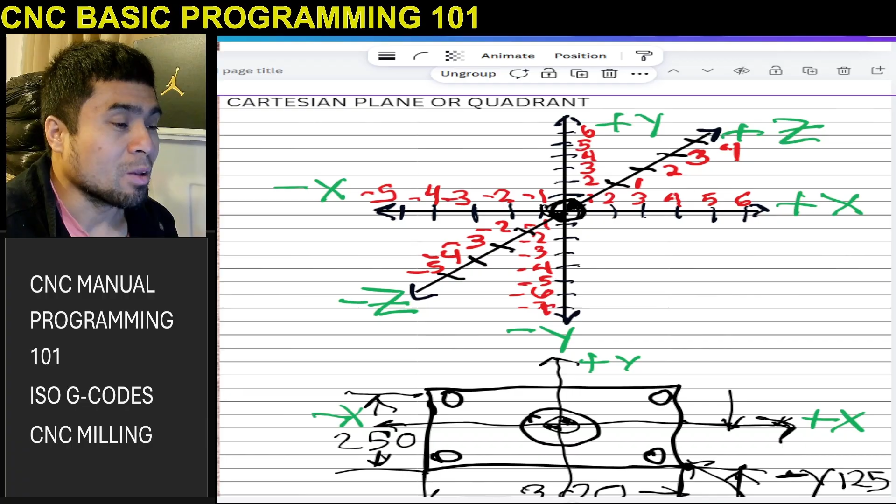So the topic today is, because in the previous video you already understood how the Cartesian plane or the quadrant is applied to the programming of parts. So I hope you already understand the use of the Cartesian plane in the actual programming of our parts. Once you understand the Cartesian plane, you will not guess anymore what value you should put in your program, because you already know if it is a positive or negative value.

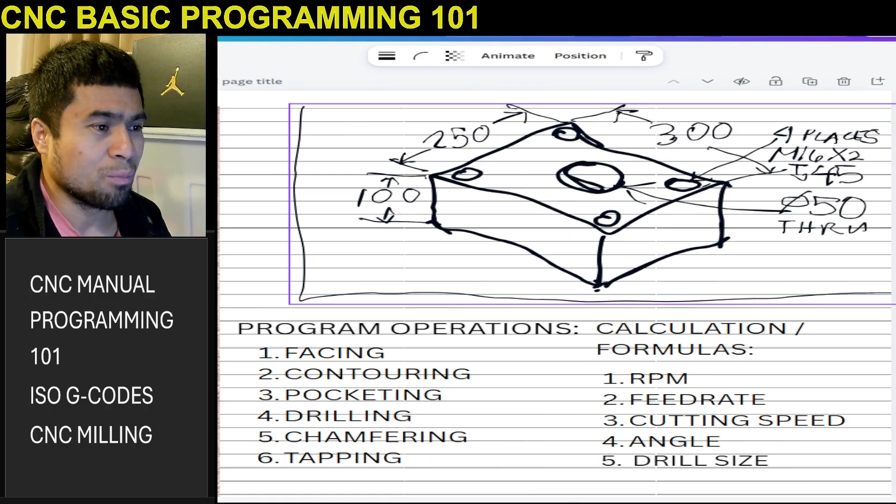So let's begin. Our topic today is the facing operation. Because this is isometric, I want to extract this one in an orthographic view. So let's get the top view, side view. But because we're programming the facing at the moment, I think I can copy this one. Let's just copy that one somewhere here on page 3. Paste.

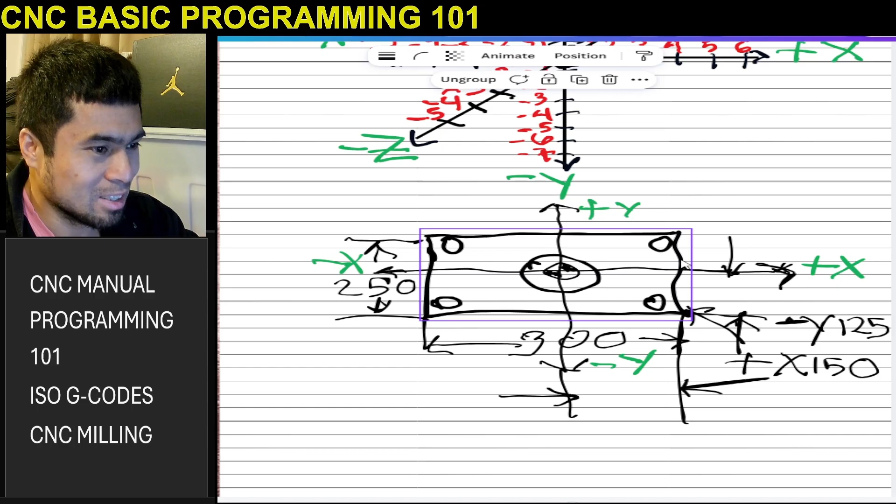Oh yeah, but only those. I will highlight again. I can probably copy all. One, two, oops. No. We can just copy one by one. But anyway, we will probably just draw. It's just easy to draw.

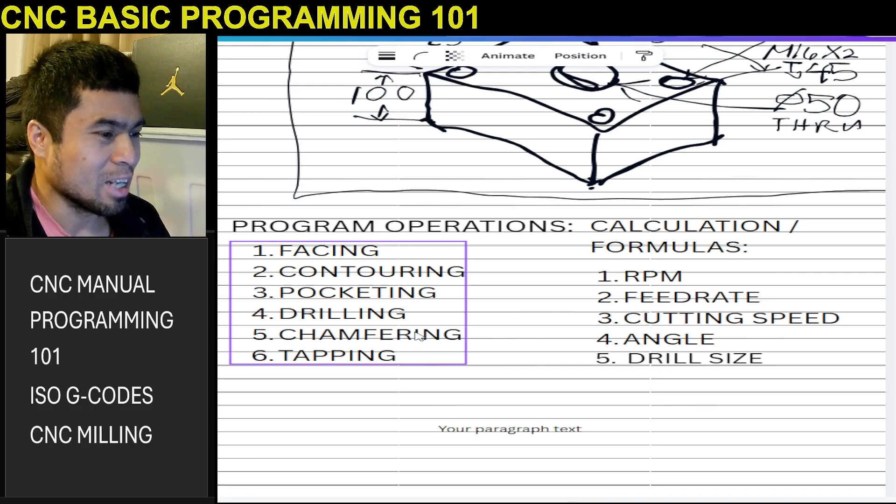So, for our topic for today, let's begin the programming so we can go directly. We will do all these operations: facing, contouring, pocketing, drilling, chamfering, and tapping. So number 1, I just want to put somewhere here the title of our first operation.

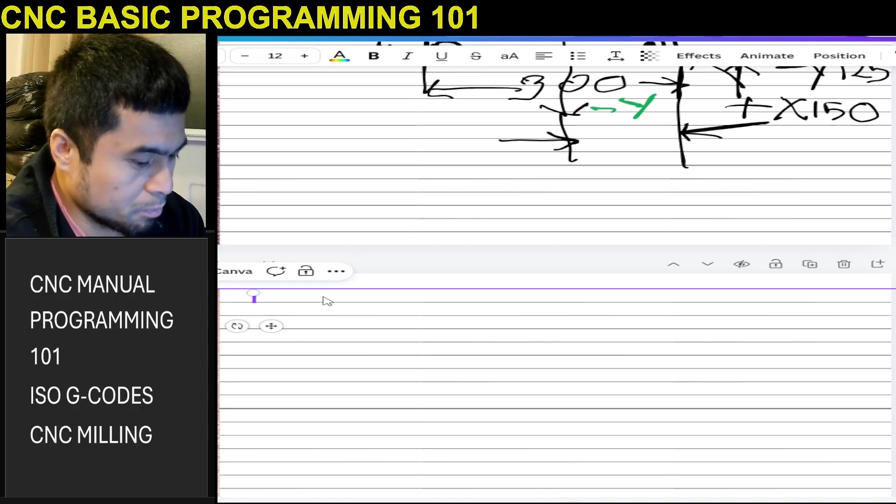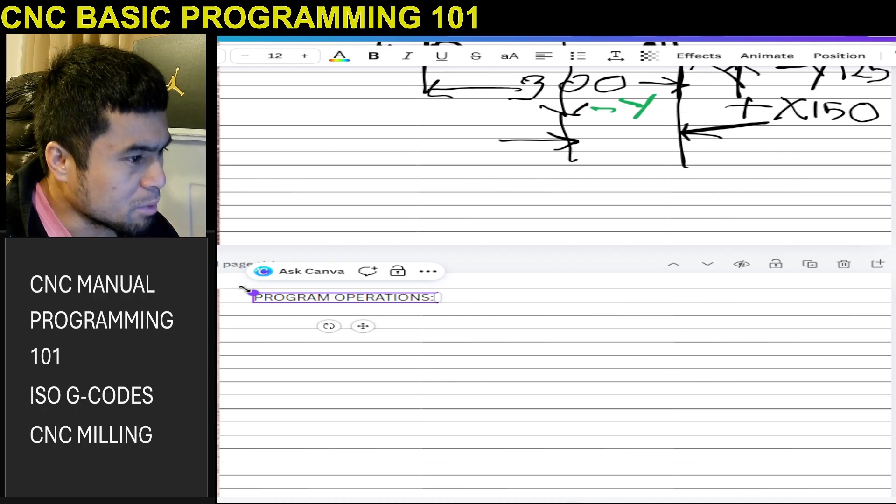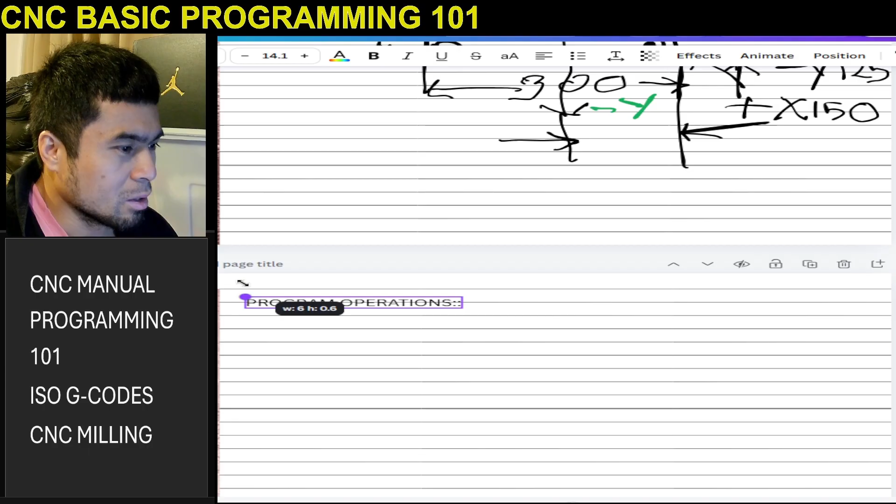Program operation. So program operation. Then I will highlight that. I will make it a little bit bigger so you can see the font. It's quite small, so, yeah. Can you see that? Why can't it get bigger? Ugh. I think that's all right. Just enough for program operations. Why is it doubled?

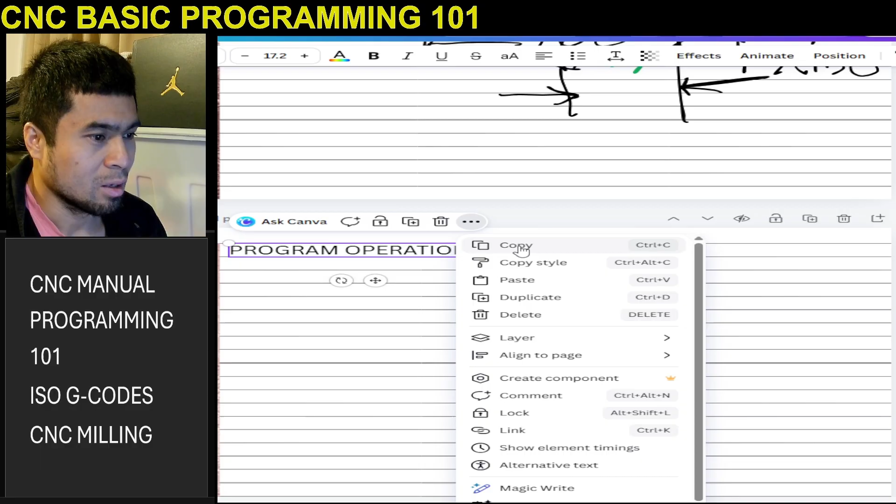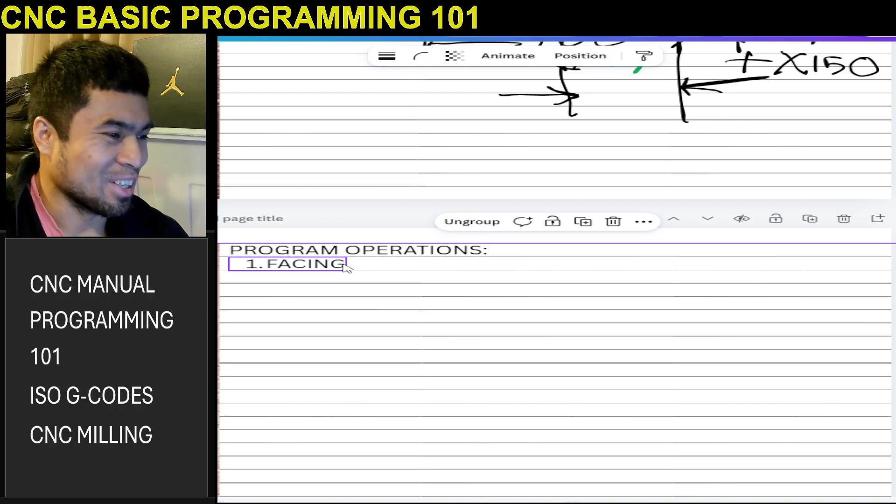Okay. So number one, tapping. I'll just copy that one and replace. Paste. Oops. Tapping. Why do I keep on saying tapping? Facing. Number one, facing operation. Yep. Oops, there's a number two there.

Just wait a moment. I'll just get my old notes so that we don't miss a single detail, right? Just wait a moment, please. Anyway, I cannot find my notes. I have some notes, but my old notes I think I put somewhere. Because you know what, I want to show you this one example. So all these old notes,

can you see it? I have a lot of books here. See this one? This book is from when I was trying to learn AutoCAD back in UAE when I was working. This year is 2010, if you can see there. Jumil Ignacio 2010. Can you see the date? AutoCAD. So I used this book for AutoCAD notes, and because it was not totally full, I also wrote in half of it when I was studying Mastercam.

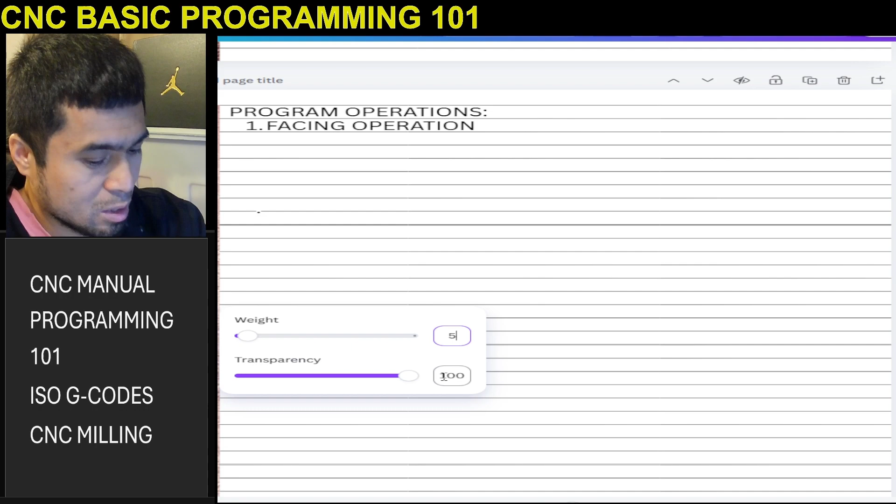So first, oops, it's not the one. It should be black. Let's make it 5. Then square. Again, please bear with my drawing, we're just using the sketch pad and it's really hard to use. So just assume that this is our block. You have to get the top view. So we will do the facing.

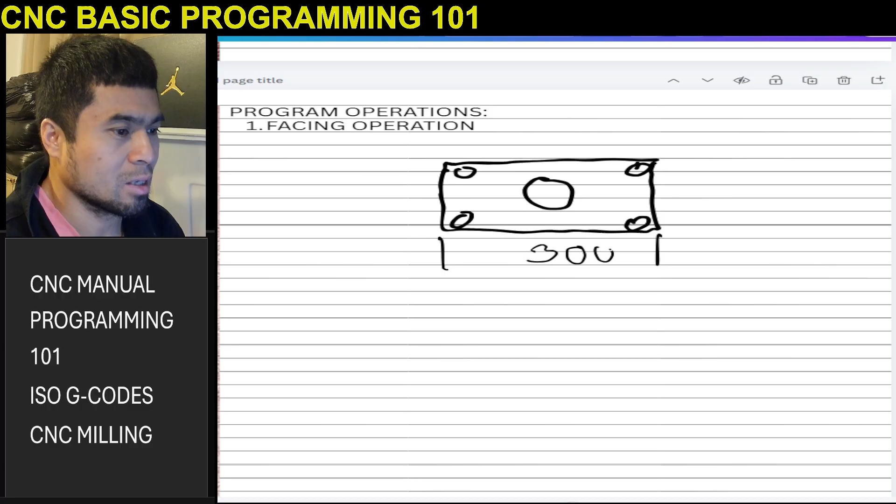So the dimension for this one is 300, and this one is 250. Yeah. Because we already have the drawing, for the origin you can pick whichever you want. You can pick somewhere here. You can pick your origin on this corner.

You can pick the top left, the top right, the bottom right, the bottom left, or the middle. You can pick whichever you want, as long as you understand how the Cartesian plane works for your origin. But when you do the programming, don't make it so hard. Make it easy, because you're the one who will read it and run your machine.

So make it as easy as you can, because at the end of the day you will read your program, and if it is hard to read, it's time consuming. So for me, for this kind of part, obviously we will take the middle as our origin or datum or WCS, right? The center is our origin, okay? If you want, you can still draw the Cartesian plane, but it's not necessary. I'll just draw it so you know what our origin is, okay?

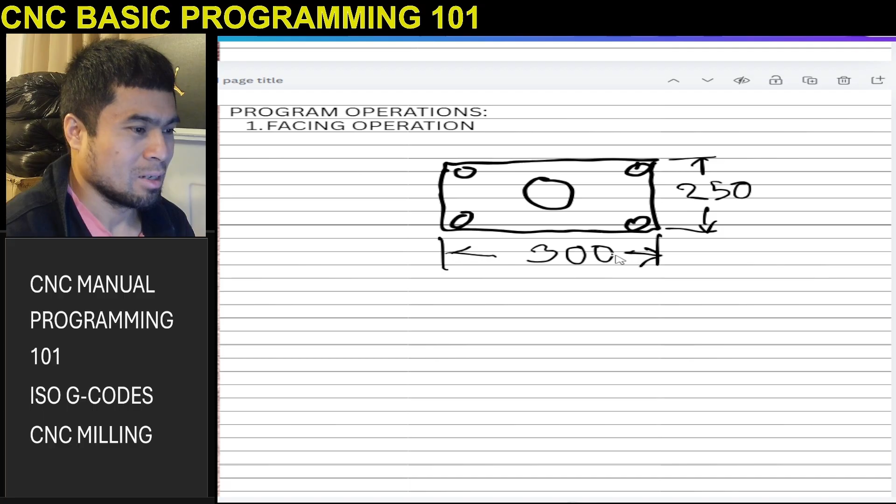Oops. I'll just draw it so that at least you know that is our origin from our illustration. Oops, it's not in the middle. Oops. It's not in the middle. Oh, wait, what? Why? Where is the other one that I already drew previously? It's really hard. Yeah.

So our origin is in the middle here. Let's draw the symbol of the origin. So that's the origin. Our origin is in the middle. So that's our origin. So we have 300 by 250.

So before doing the programming, the first step, before you do the program, you have to study your drawing first. You have to check your drawings, whether the dimensions are complete, is there any missing detail. So after you check your drawings, of course, while checking the drawing, you can figure out already where your origin is.

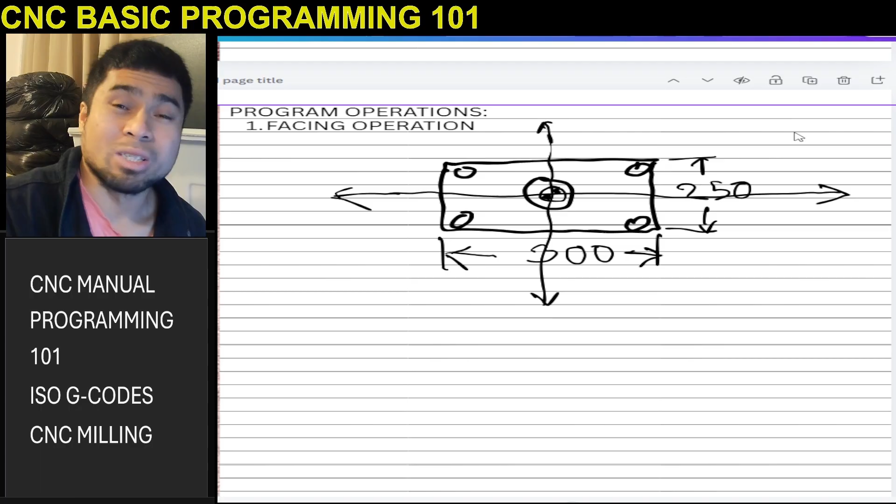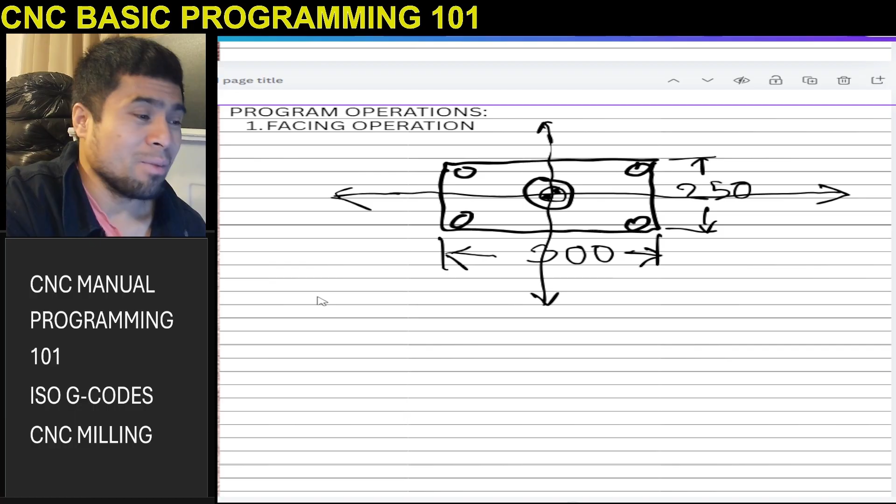So since our first operation is a facing operation, basically you need a face mill cutter. So you have to know what tools are available in your machine. Because we're just doing a sample program, let's say our face mill cutter is diameter 100. So I'll put notes here, some details, so that at least you will know that.

So face mill. Oh, what is that? What is that? That just came out there. So face mill. What are your tools?

Let's put the origin first. WCS is middle. How can I put that so that it is easy to see? Probably A. WCS equals middle of the part. Middle of job. Of part. So that is A.

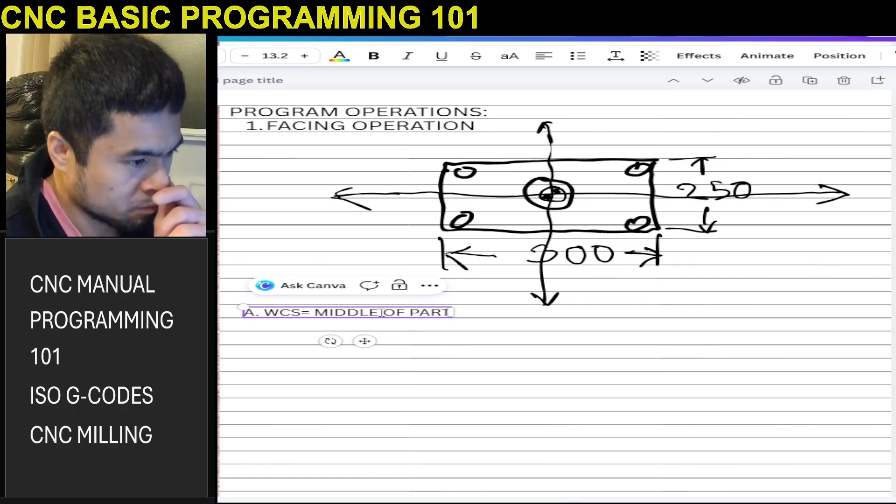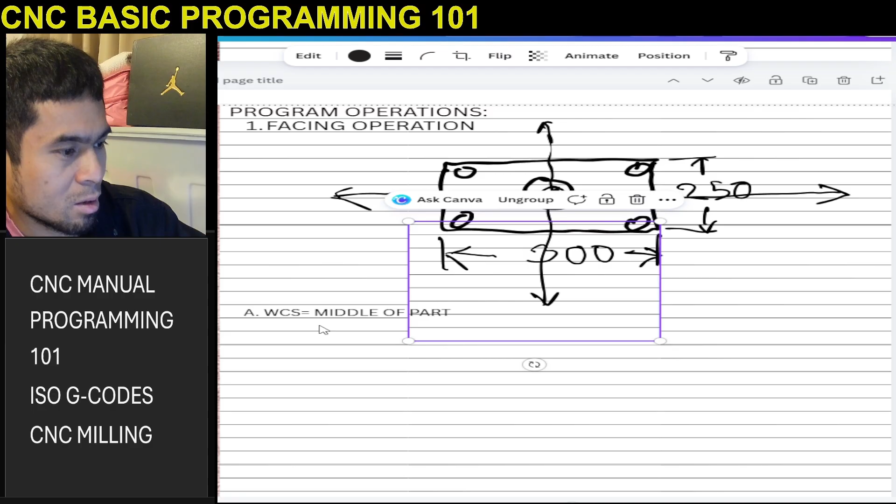Why is it highlighted every time? Can I just control copy and control V here? What is that? Okay. So B, tools, face mill, diameter. How do I type the diameter symbol? Alt 0216. No, it's not applicable. Oh. No, not that one. How did that one come out? Not that one. Yeah, that one.

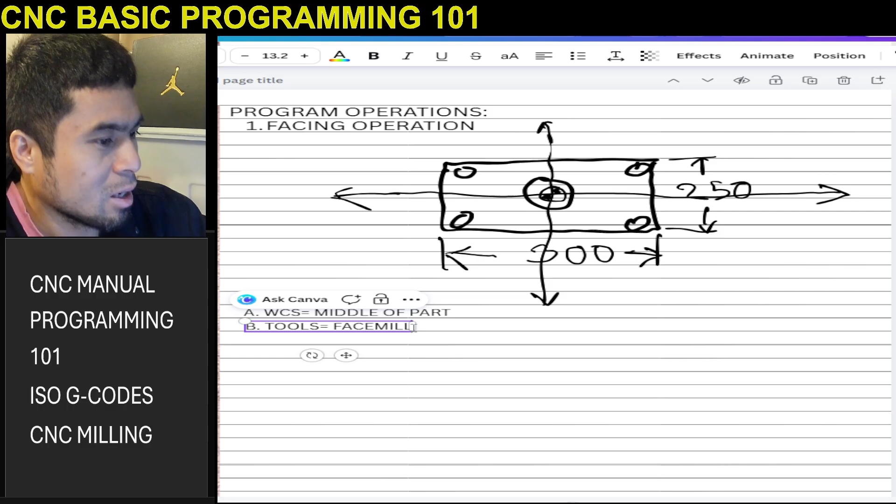So, tools equals face mill, diameter 100. Or let's just put face mill cutter D100. Can you read it there? Let's make it a little bit bigger. Let's make it bigger. Yep. So A.

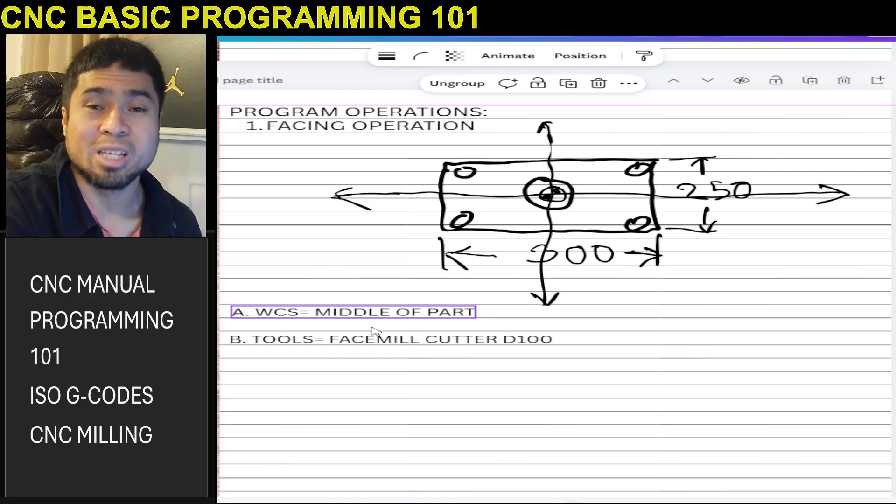So you have to know what your WCS is upon checking your drawings. Check what the WCS or your origin is. So middle of part. You decide which point or which corner you are going to use for WCS. But obviously in this kind of part, I will take the middle as my WCS, as X0 and Y0 origin.

And second, check what tools you have available. So for me, for example, I have my 100 face mill cutter, D100, a diameter 100 face mill cutter available in my machine. If you have 80, you can do it too. But for our sample program, we can use diameter 100. So you have your WCS, you have your tools to be used. So let's begin the program for the facing. So, program.

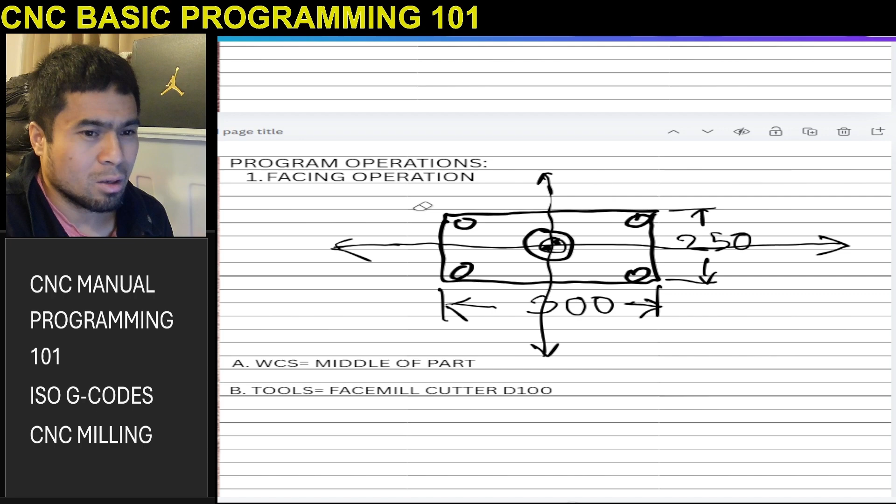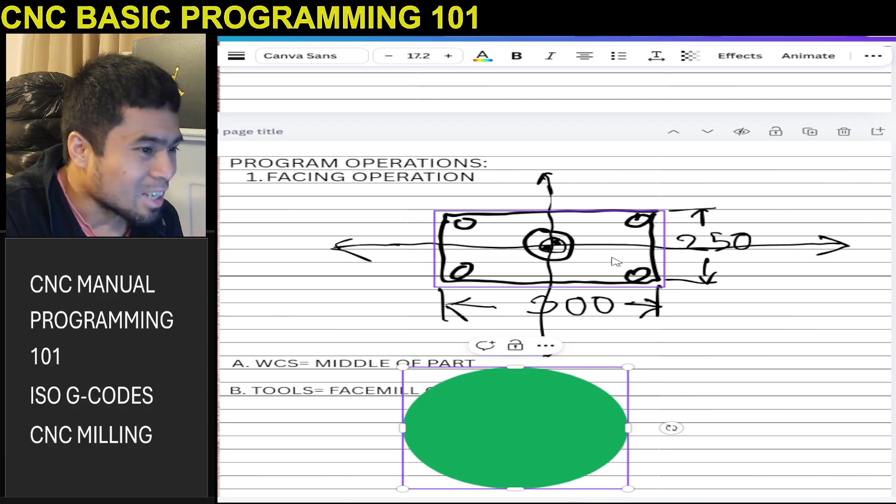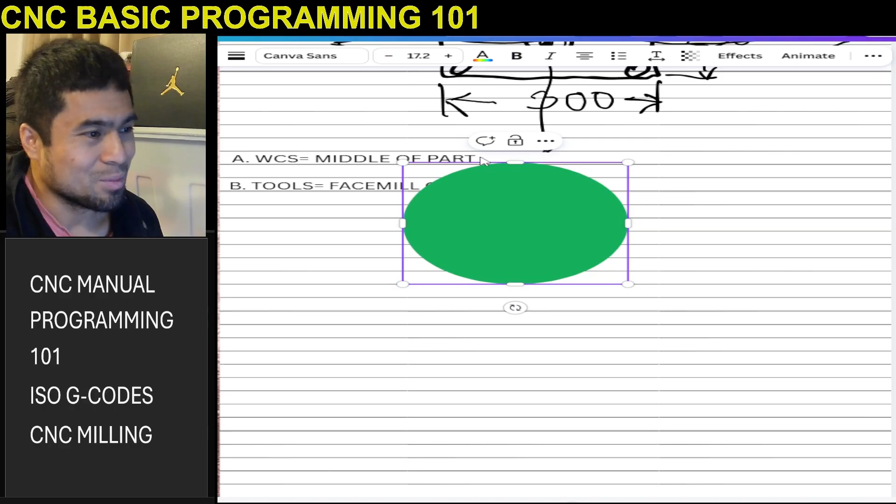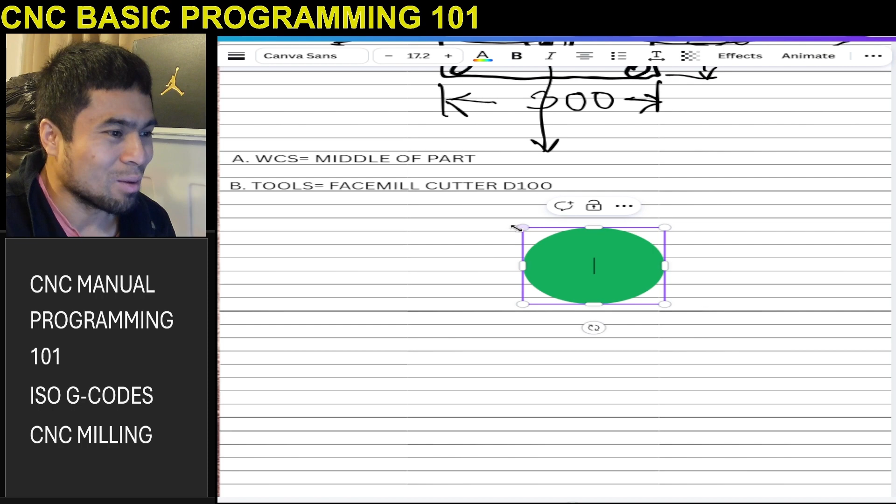Is our page still enough? I think so. So for the movement of my facing, I want to move something like this. When I move the, where's that, I'm supposed to use this one. Yeah, like that. Okay, good that we have it like this. Because let's say this is our face mill cutter. So for example, oops.

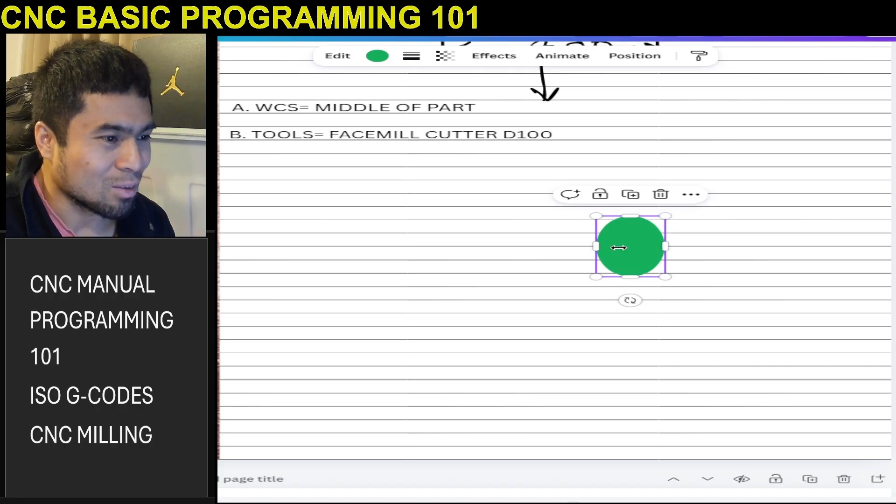So for example, if this is our face mill cutter, I want to move my face mill from this right side, downside of the part, on this actual position. I want to start my tool here. Then it will move going left like this, pass that, then retract, position again here, pass again, retract, position again here, pass until it's all skimmed.

You can choose whatever you want. You can pass something like zigzag type, pass like that, zigzag, pass like that, zigzag, pass like that, and go up. You can do like that, but for this tutorial, I'm going to pass like this, just one way direction. Go up, up, then back here like that, then go up, back here like that. I want to pass something like that, just for tutorial, so you will see the movement.

Okay, there's nothing wrong with it. Let's say just wrapping. So some of the movements that you can do as a facing, so you will not go up, something like a zigzag type, something like that. That's all right. Also, from here it will go like that, go up like that, like that. So it's facing, so probably we can do like that, right? Just for the facing operation.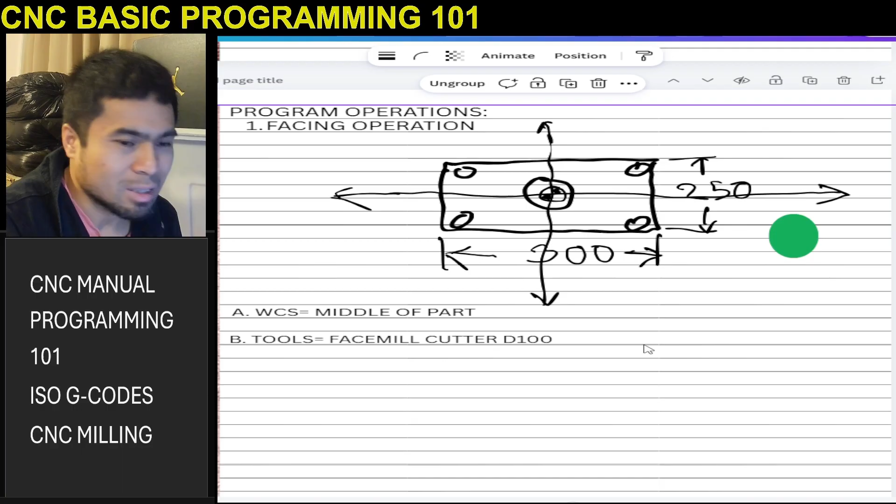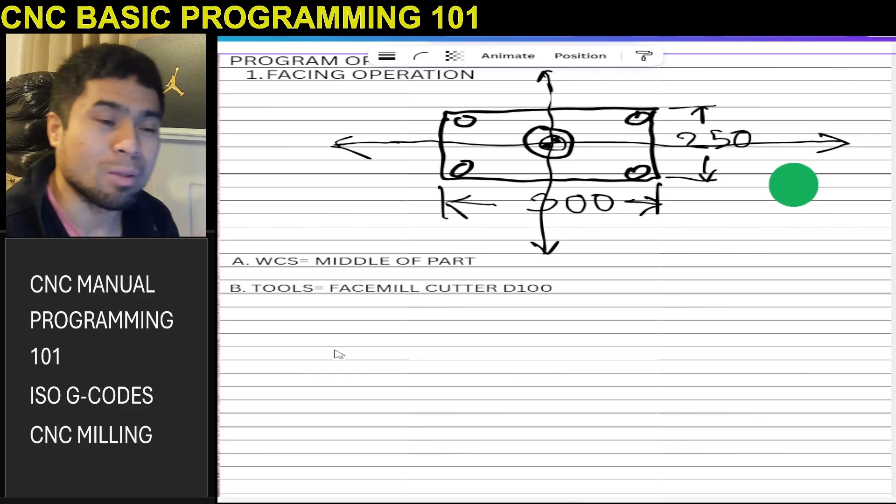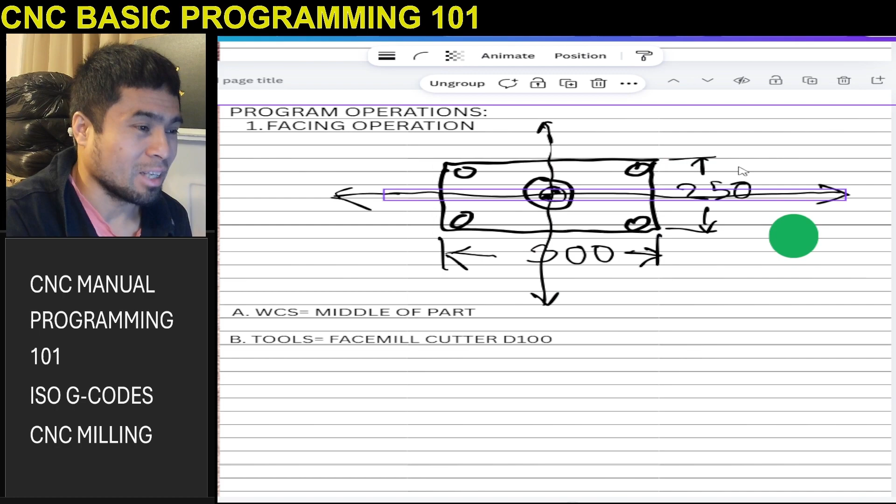Okay, so programming, pacing operation. So when you do the program, please bear with me, my fellow machinist, please bear with me, because it takes a while before it's just easy basic operation, but I want to detail it by detail from top of the program until the end. So this first program will obviously be a little bit long because I want you to understand every detail of that block.

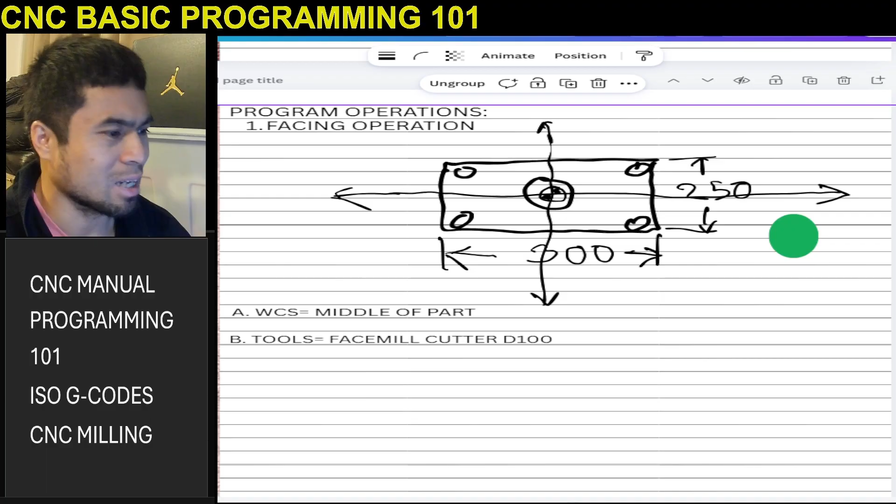So when you do the program first, I'll number it so that at least you have a number. Create text, or I'll probably just copy that one. So the font is already there. Copy, paste, yeah.

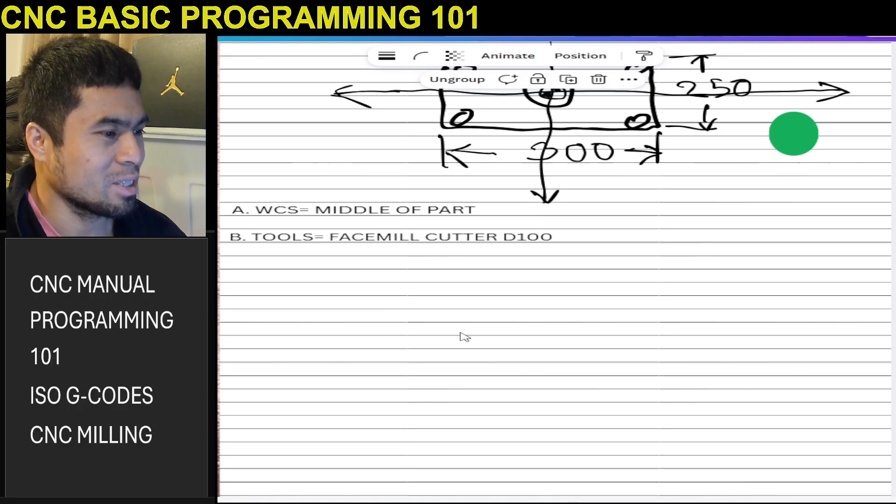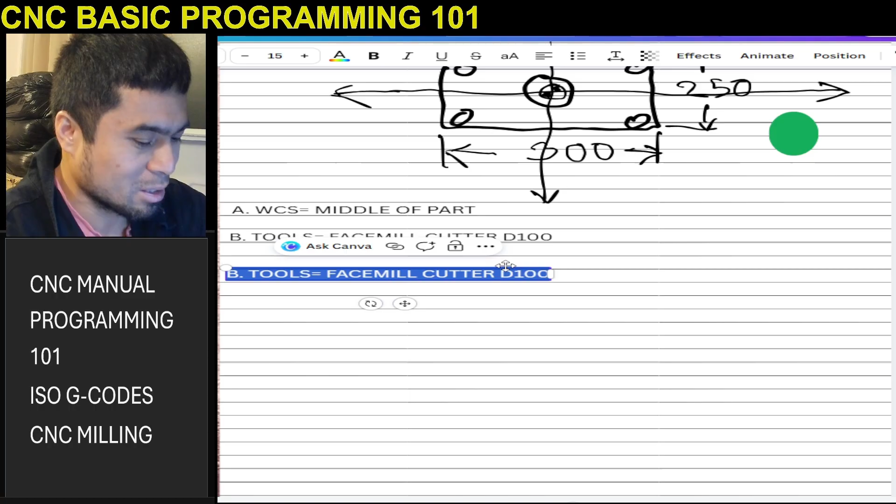I'll begin somewhere here, okay? So when you do the program, first you need to make a program number. It's already default in your machine. So when you do the program, you can just put program number, like 1, 2, 3. For our sample, let's say our program is O. So in ISO, in G-code, in Fanuc G-codes, your program begins with O. O, let's say 0001, and you can put something like this, like facing program.

Facing program tutorial, you can put something like that. So like that, you can put something like that, O001, facing program, or probably O0001 only.

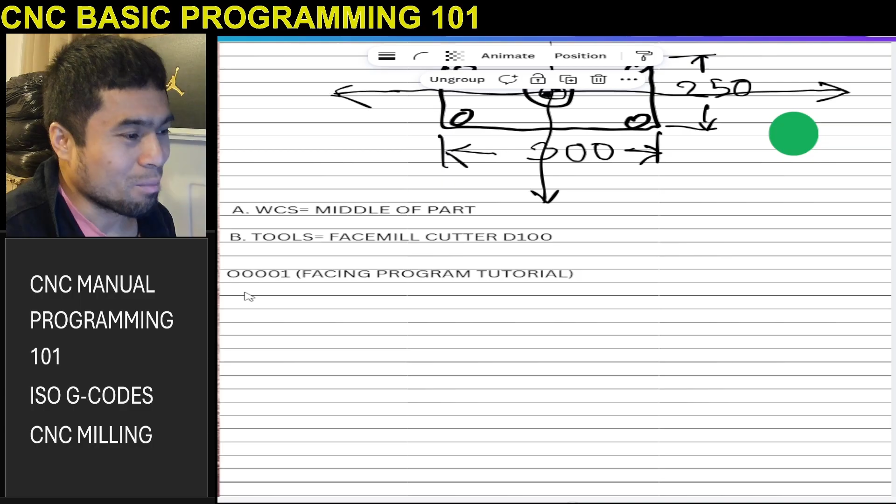So number two, when I do the program, will I copy that one? I'll just try to copy and paste. Okay, it's easy. Yep, so I'll number it so we know. So number one, when I do the facing program, because G-codes always have, like, cancellations of the active program, so there's cancellation codes, right?

So I'll put all the cancellation codes at the very top of my program, and at the bottom also, to be safe, because when you don't have cancellation and it's still active, your program is still active, you might have a problem. It might crash your machine or something. So obviously, when you do the program, put all the cancellations at the top and at the very end also. So once the program is finished, it cancels all the active programs. So at the top also, before it starts, it will cancel all the active programs, just in case.

So put all the active programs at the top. Even though our program is facing, I will put the cancellation of the drilling, cancellation of the pocketing, cancellation of the contouring, cancellation of the tapping.

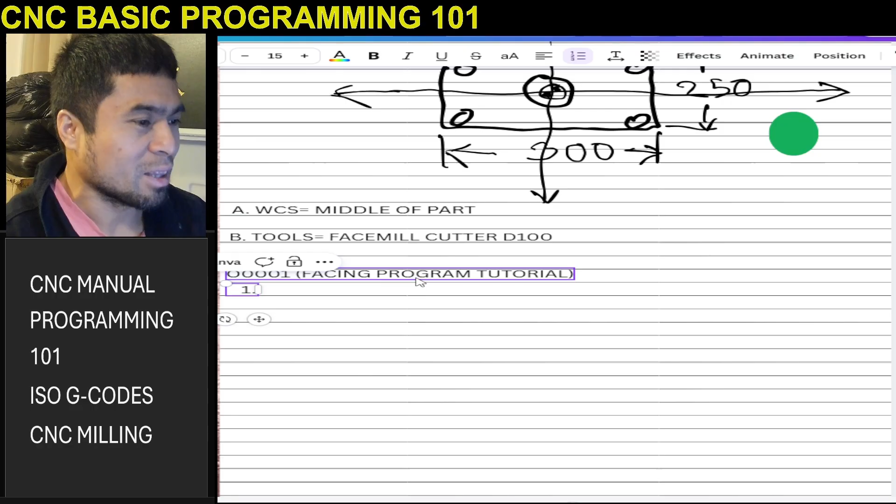Because once in the actual programming, you cannot program like program 0001 just facing. No. In the real world of programming, 0001 has inside of it all the programs like facing, contouring, pocketing, drilling, chamfering. That's all inside that program number 1. You cannot just make program number 1 facing, then create another program number 2 just contouring.

Program number 3 just for pocketing. Yes, you can do that, but it's not a good practice in the manufacturing way of programming the CNC machines, right?

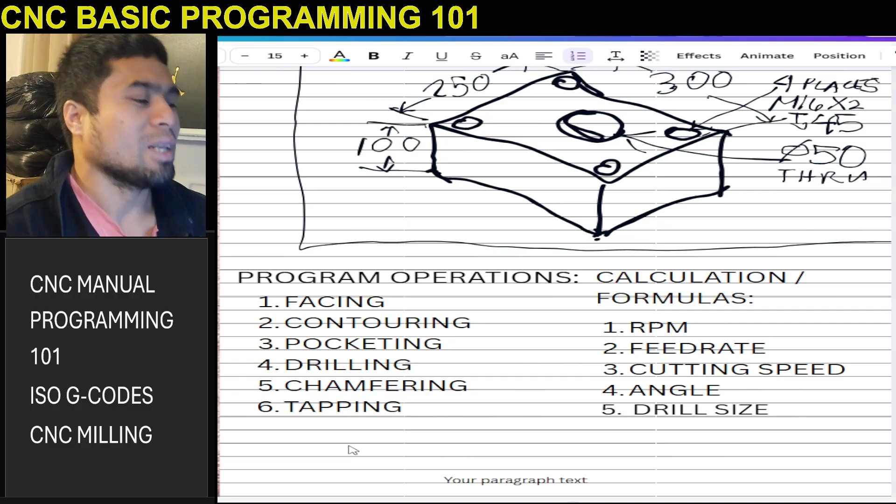So the good practice is from program number 1, you put all the facing, contouring, pocketing, drilling, chamfering. There are some instances where you can create another program just for a specific movement, like if it needs much more detail or a bigger sub program, you can do that. But as much as you can, one program number, when you run it, will go through facing, contouring, pocketing, drilling - all the operations inside that program number.

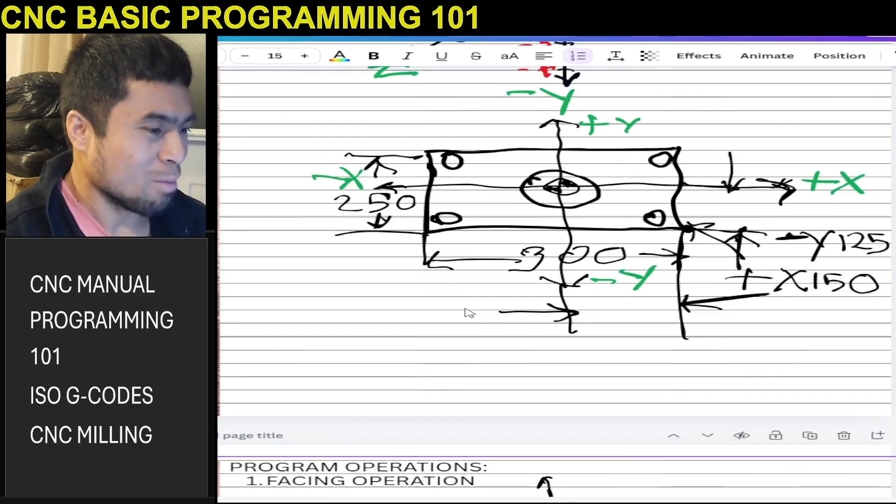So that's why even our first operation is just facing. Go back here, so we will now put all the cancellations here at the top. So after creating a program, which is program number 1, we will put the cancellations. We put there like... and I will explain it.

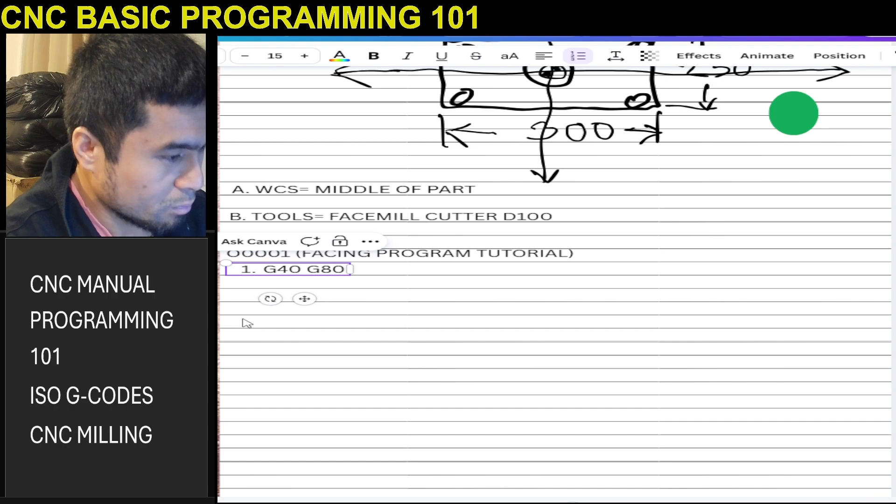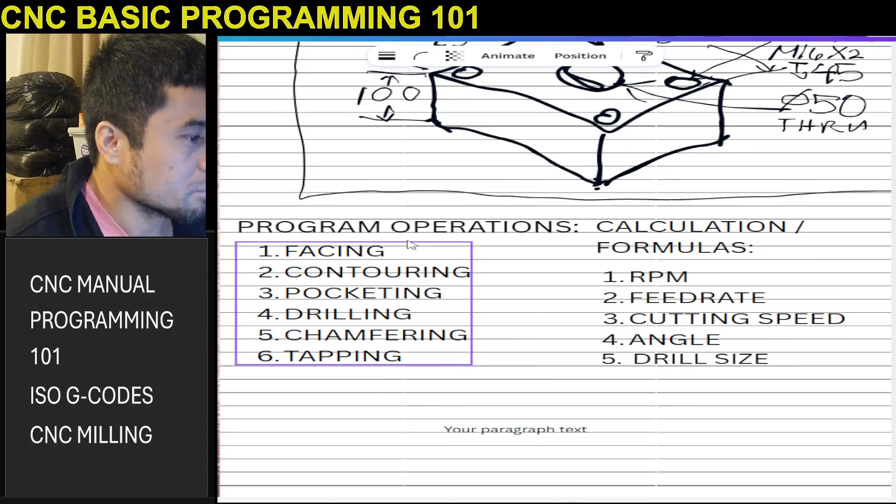G40, G80. I normally put that one at the top. So G40, G80. What is that G40 and G80? I also put G69 because sometimes there's that coordinate rotation. Although not necessarily, but since we already put the cancellation in the beginning, let's put it all. So what is G40, G80, and G69?

That's all cancellation of the G codes. If you command G40, G40 is the cancellation of G41. G80 is the cancellation of all the cycles like drillings, tappings, boring - the cancellation of that is G80. And G69 is the cancellation of plane rotation. So you have to put it there.

I'll put it beside it. So after the G69 it should supposedly be end of block, but because this is just a tutorial, we can put the definition of every block. So this step is the cancellation.

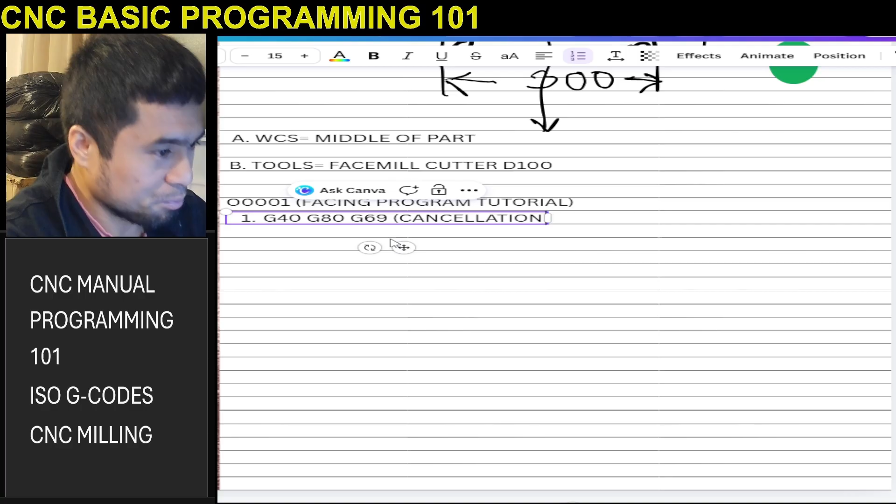So the very top is your program number, and the first block is the cancellation code. G40, G80, G69 are the cancellation codes. Can you read it there? Can you properly read it there? Okay, at least you can still read it.

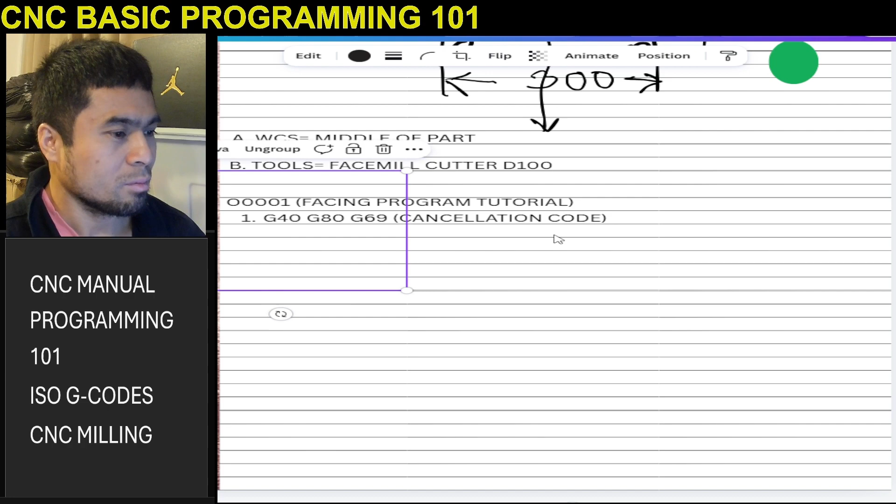Yeah, and the second one - after that cancellation, we'll go to the next block. You know when you do the programming, you have to understand your machine also, because of its movement. So normally when you do the program, example in this specific one, when your tool is here, it will move somewhere here, right?

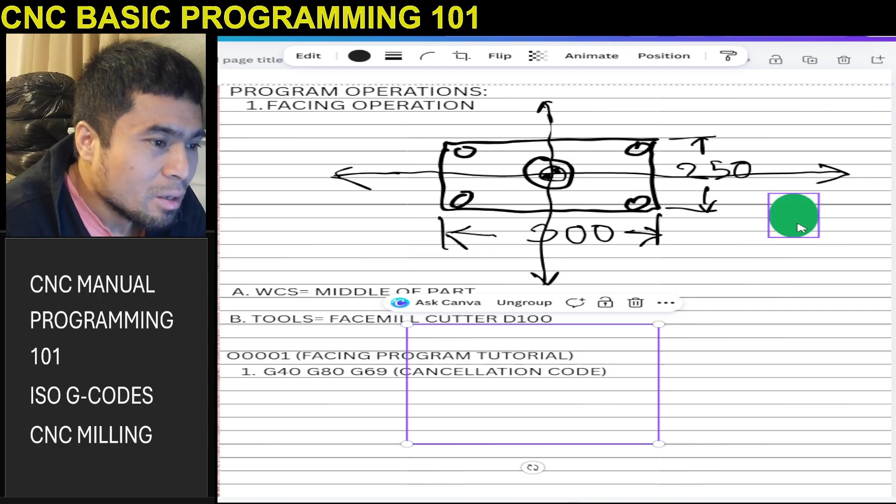When you do the program, before - aside from the cancellation code, the G40, G80, G69 - the next one is your home reference position of your machine. Why it needs this: before you move to this position, to begin the facing, you have to home reference your machine first.

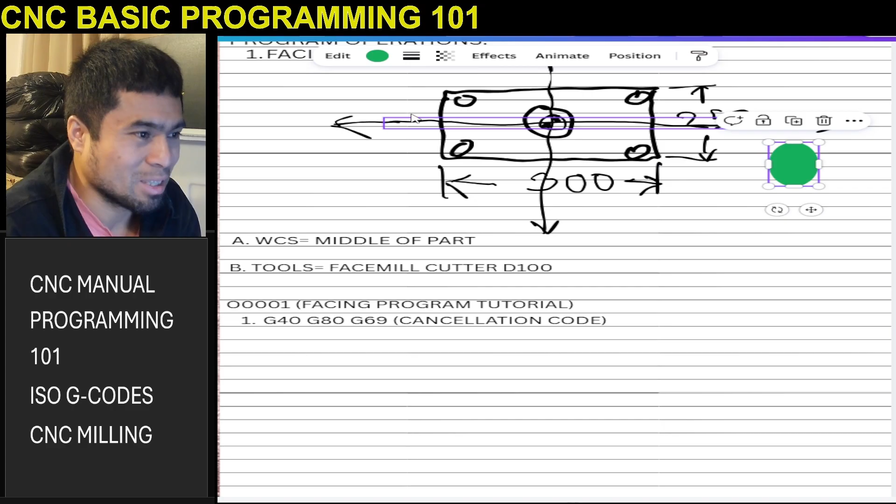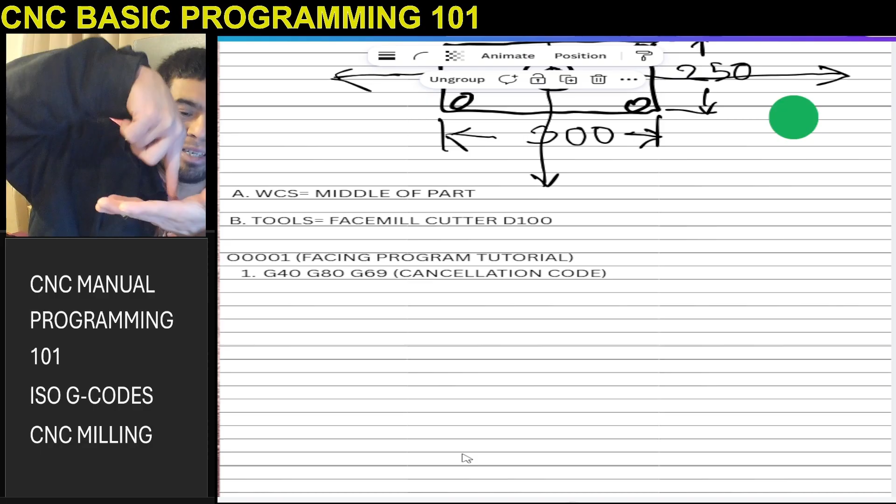Example, if your machine is somewhere, if this is your machine, if your spindle is somewhere and it might hit something, so you have to put as your second block the home position of your machine. It will just home first to whichever home position before moving to the positioning of your cutter for the first positioning of this face mill.

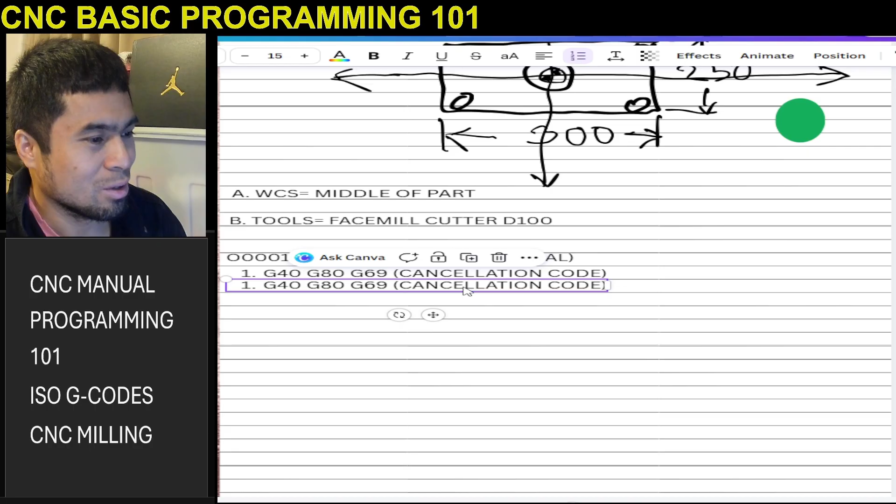So that's the second one. Second one is home positioning. I'll just copy that one and align it there, which is number 2. Home positioning - so what is the code of home positioning?

G0, G91, G28, Z0 - machine home position, Z axis.

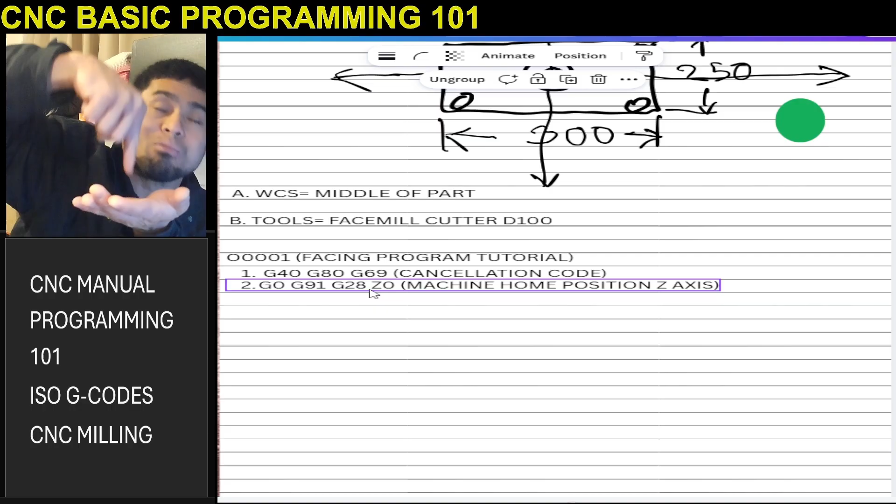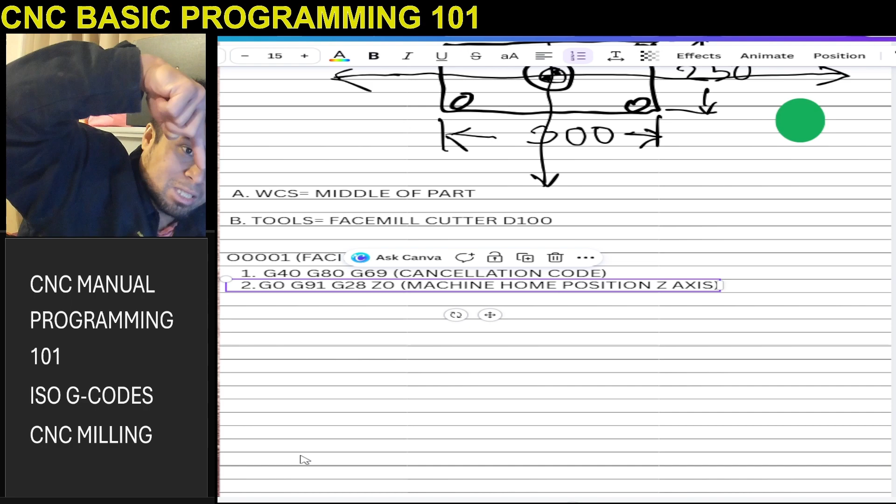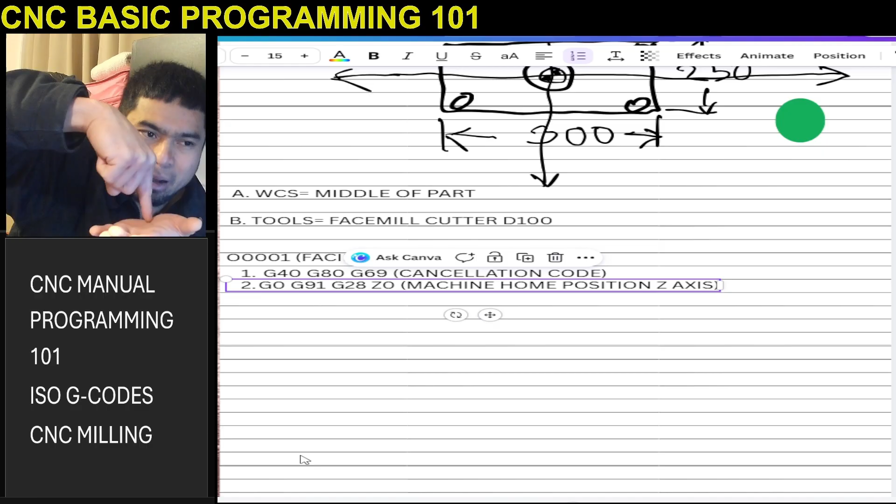So why did I just put G0, G91? When you type G0, G91, G28, Z0, when the machine reads this, if the tool is here, the machine will go up to the reference position, the said reference. It will go all the way to the positive position when it reads that. I normally don't include X and Y because I just want to move the Z first, before moving the X and Y, because I don't want the machine moving sideways and up at the same time.

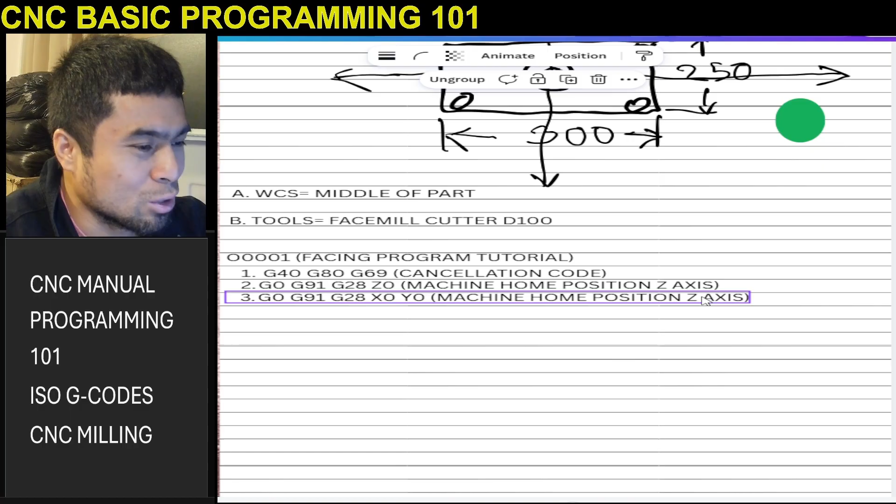Because you already have G0 on top, it's okay not to put G0 here, but it's still okay if you do put it. So, machine home position, X and Y axis.

So that's the first 3 blocks at the very top of your program. The first block is the cancellation code, G40, G80, G69. The next one is machine home position, Z first, move it to the top first so there's nothing to hit. When it reads this, it goes all the way to the top. Then the next one moves to X0 and Y0, the home position of the machine. If your home position is on the right, it will go there. If it's on the left, it will go there. So that's the very first 3 blocks of your program.

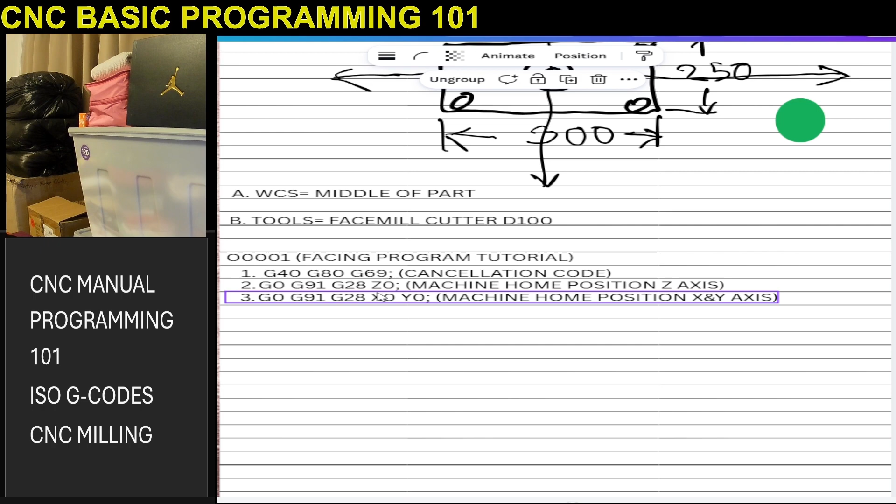So after the cancellation, home position to Z, and home position, machine home position to X and Y axis. So the next one is the tool. I'll just copy it again and leave one space so that at least you'll know it's the next one.

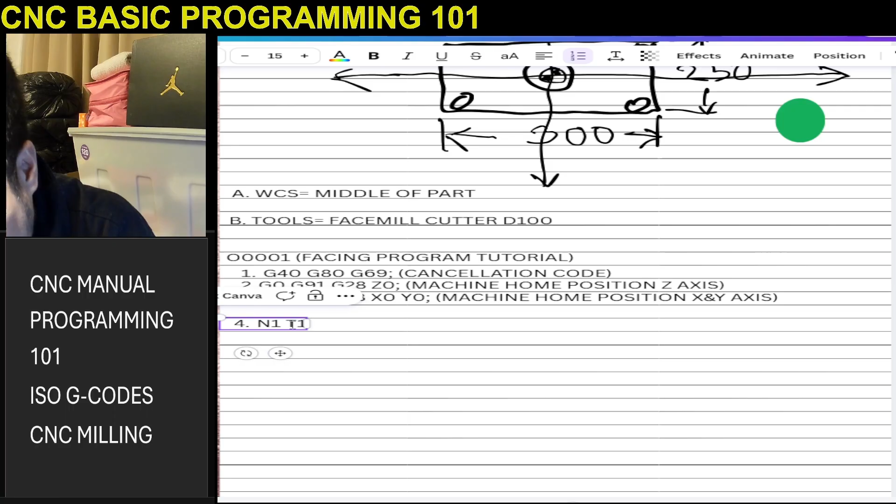And number 4, so what you will put in number 4? N1. I'll type it first, right? N1, then space. You can put tool 1. You will put first the tool 1. M6.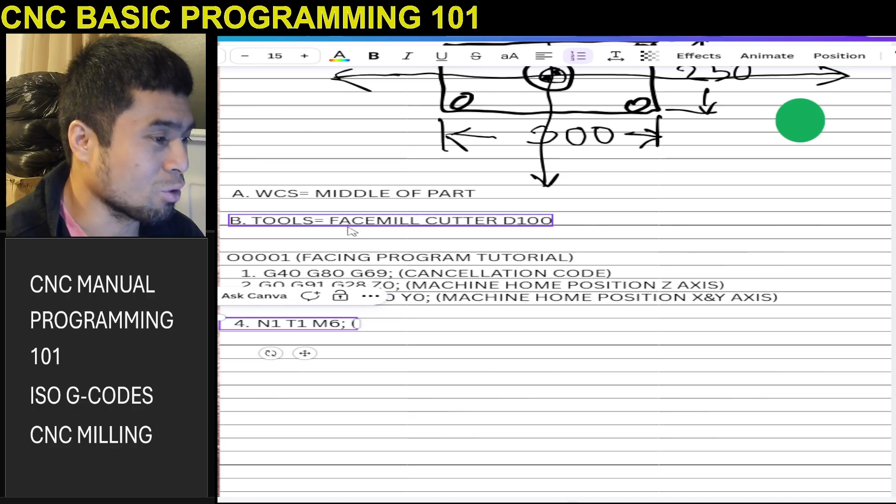Then in a block insert. Then up the side we will put the tool number, because for our face mill you have to assign your tool, like the face mill D100, which is right here. You have to assign your tool whatever number, because this is just for the tutorial. For example, your diameter 100 face mill cutter is in tool 1, so that's why it's T1 M6.

So we put here face mill D100 cutter. D100. Good. So that's your number 4. I leave space there because I want to specify that that is the next step. Is that called next step or next field? That's why I leave space here, because if there is no space, it's really hard to tell which part you are in now.

N1. What is N1? N1 means sequence number 1. We can use that later on. There are some specific programs where N1 is usable; it's not just to say that N1 is tool 1 and N2 is something else. No, there is a use for that specific sequence number. We can cover what the real use of N1 is later in another tutorial.

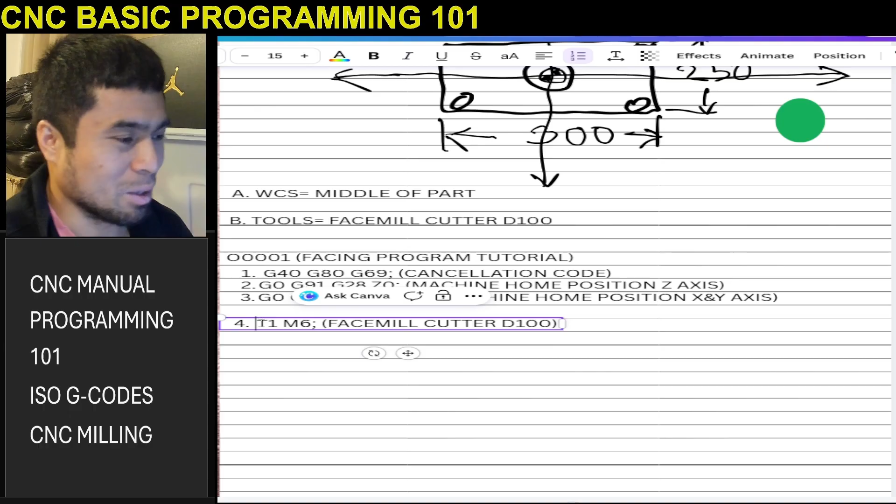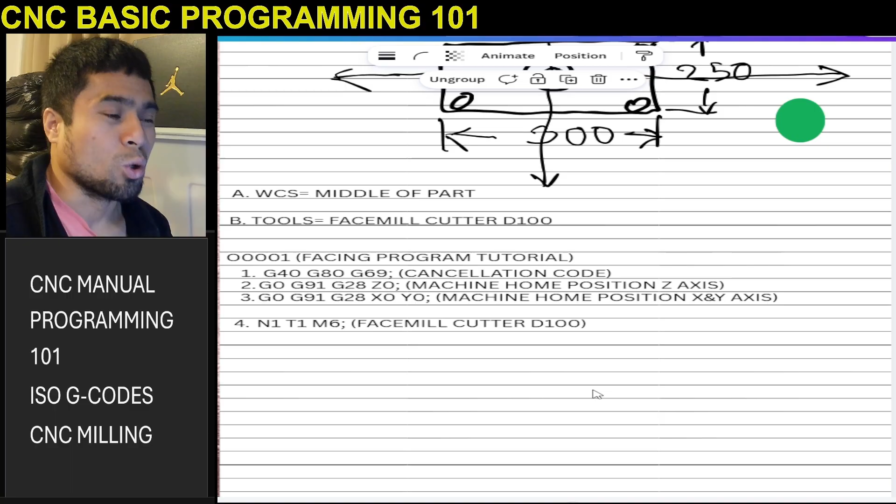But for now, you can even remove that N1 and just put T1 M6. It's all right. There's no use at the moment for N1, but I just want you to know what N1 is, so I put it like that. N1 equals sequence number 1, T1 M6. And N2 is like tool 2, which is the next operation. What is our next operation? For example, from the very top, contouring, and N3 is pocketing. So we can put something like that.

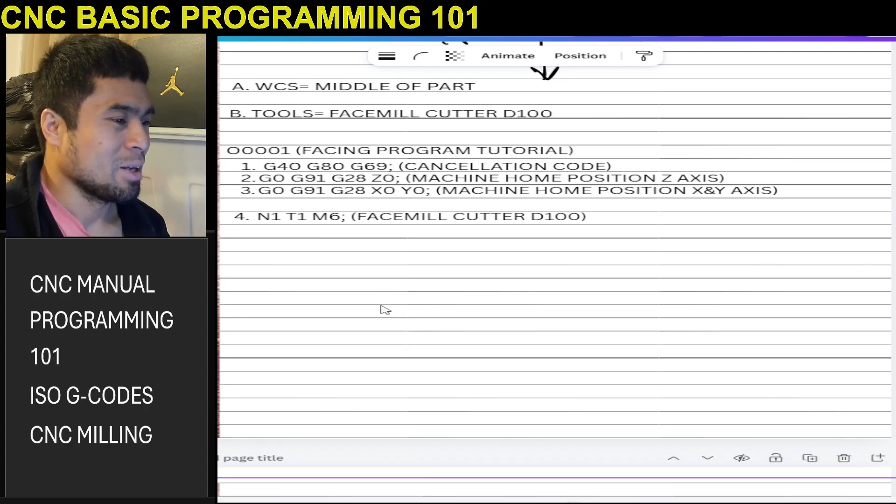Sometimes we use the sequence number to jump. For example, we want to jump to a specific block, so we just search N1 or N2 to jump right exactly to where you want to go. Because if you don't have N1 or N2, it's sometimes hard to jump right away to that part of the program. Or sometimes you require that sequence number for another topic in our future video tutorial.

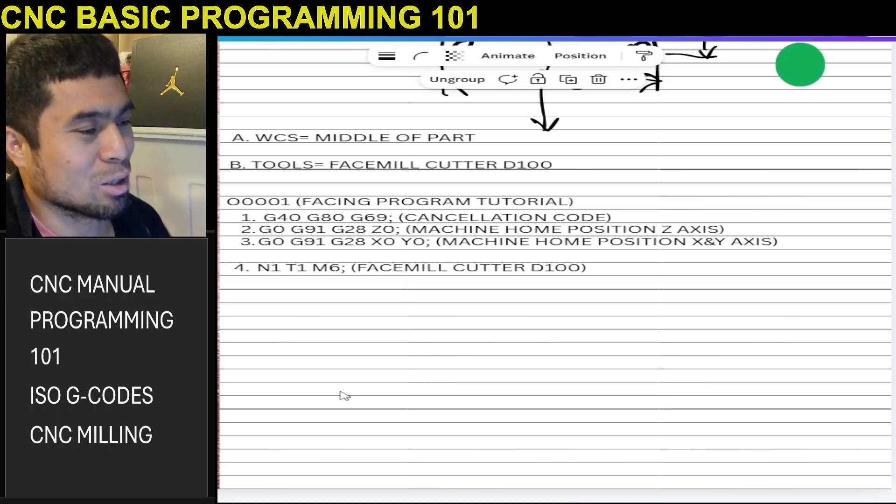But for now, N1 is sequence number 1. You can put it in right now, or not. If there is no N1 right now, it's all right. There's no special use at the moment for N1. But because I want to show you the proper way, I put N1, which is sequence number 1, and T1 M6. You can put N1 at the top, then at the bottom T1 M6. There's no problem with that.

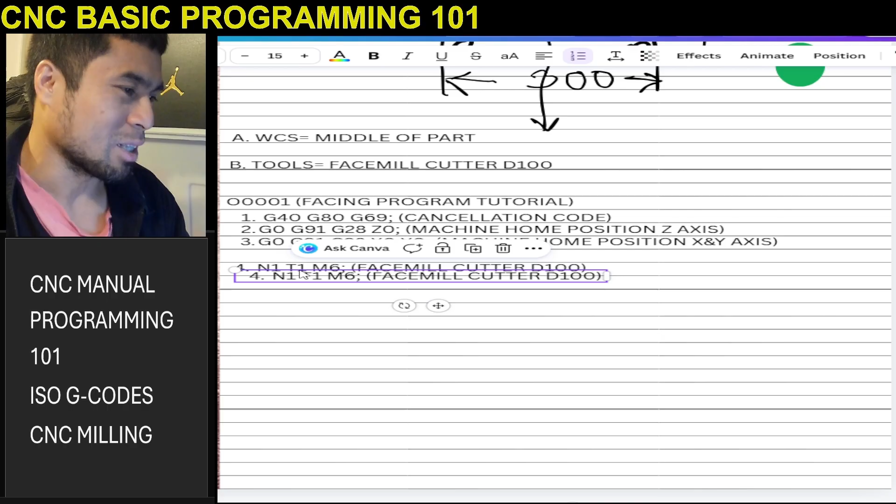So N1, because this is a tutorial, I think we can put that in. I label this one as 5, so that you can easily see what that N1 is: sequence number, which is 1. So N1, sequence number 1.

Sometimes beside the N1 I'll put facing operation, something like that. For example, if you have N2, you will put pocketing. So I think it's a good practice. I will put facing, something like that, in the block insert.

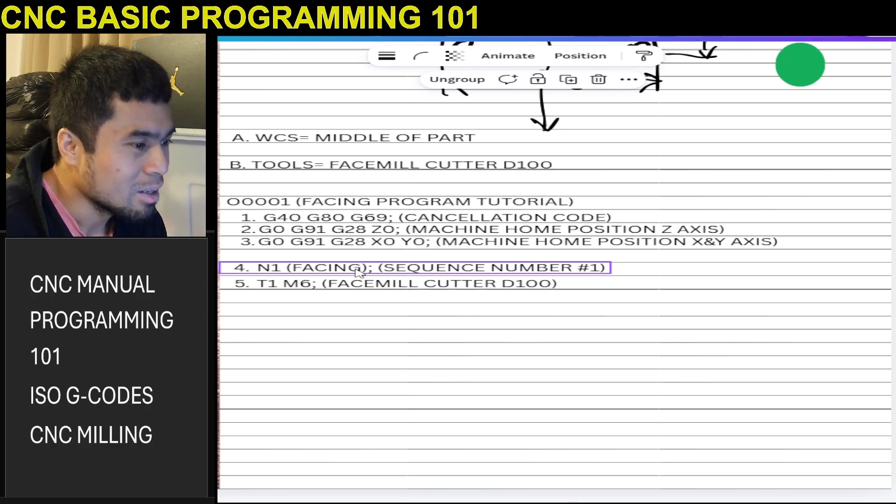Actually, the end of block is at the end of this. I think I will put it somewhere here so that you can understand right away. I put the end of block at the end of the notes, because N1 facing is actually a note. So it means sequence number 1, that N1. And here, I think this description should be here also: face mill diameter 100.

And the end of block is, oh, what is that? What happened? So I will put the end of block at the end, because it should be there. Then T1 M6 is the tool change, so I will put that again. So that is the tool change command. So tool change command, that's T1 M6.